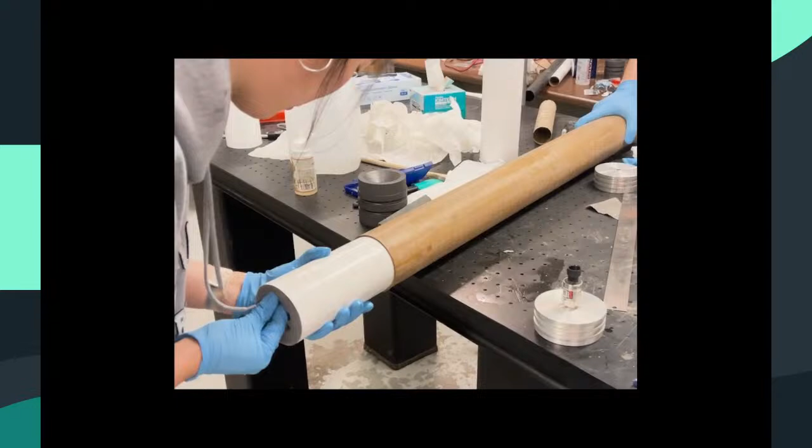It means doing things by any means necessary, even in the face of adversity. From within, to push away my fear, to stand where I'm afraid. I am through with it. It means rising up to the challenge in pursuit of greatness. Will you be a witness?

This is how we're going to space. The night.

They are the Rensselaer Rocket Society, and their rocket's name is the East Coast Ghost. The East Coast Ghost is a white rocket trimmed with black, and we're sending Rensselaer Polytech in 5, 4, 3, 2, 1, ignition.

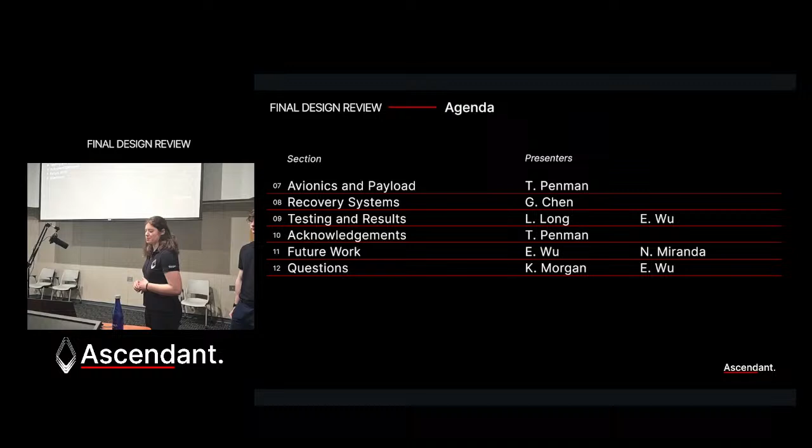Alrighty, so we'll kick things off. We have a brief introduction into our team structure and a little bit about what we're actually trying to accomplish here. From there, we'll delve into more of the technical aspects of our subsystems, and we'll thank all of our amazing sponsors and help that we've received along the way. We will talk about our future plans, future work, and then we'll do a little Q&A session at the end, so I ask that you please hold your questions until then.

So starting off, what do we do? We are the Ascendant Research Group, a faction of the Rensselaer Rocket Society, and our mission started all the way back in 2022: to develop a two-stage rocket on our own composite rocket propellant to launch up beyond the Kármán line, which is the international line dividing Earth and space.

So how will we get there? To start off, our design is a little different from some other typical college teams that you will see. First of all, we are going with a two-stage design, which is more efficient in terms of propellant and cost than a typical single stage. Additionally, we manufacture and design our own custom propellants in-house. This is different from some other teams that may get them outsourced or bought commercially. This way, we can customize our propellants exactly to our own needs. And then lastly, as you saw, we are a pretty small team. When you see rocket teams, typically they're upwards of 60, 70, if not way more people. Our team, we like to keep it small, and all of our teammates are very highly focused and dedicated to the project, so we all have a lot of skin in the game.

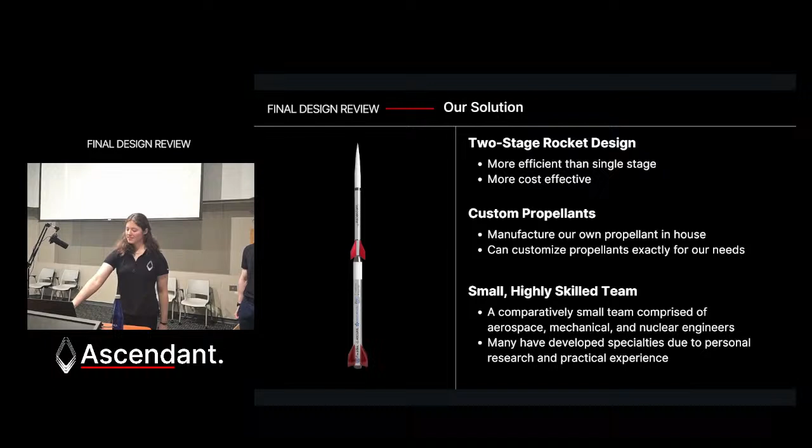So I'll do a little brief subsystem introduction. We have our propulsion team, this is the one that I'm personally a part of, and we go into the actual development and formulation of our solid composite rocket propellant. This involves writing our formulas, writing our mix procedures, actually mixing the chemicals, getting all the safety procedures written out so that we can actually pull this thing off, and more.

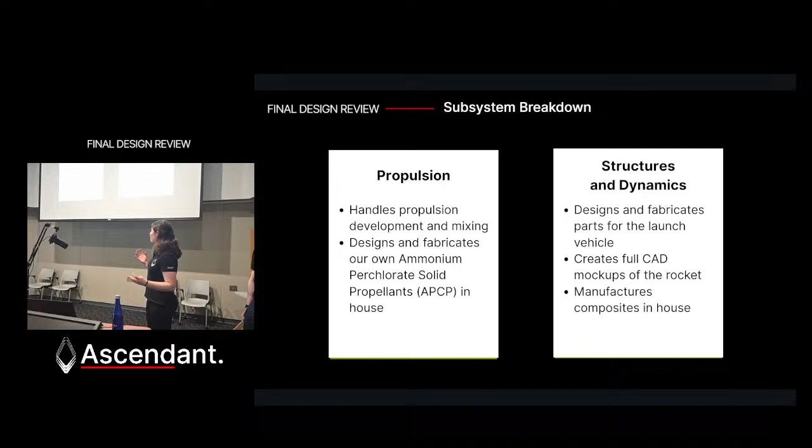The structures and dynamics team design and fabricate parts for the actual launch vehicle. So our rocket, as you may be able to see up front, this is one of our stages, was all developed with CAD first and foremost. Our computer-aided design, we have full CAD drawings and designs of everything. That was all done by our structures team. Dynamics also simulates everything so that we can predict how it's going to behave in our flight. We also manufacture a lot of our composites in-house. So this nose cone was fully manufactured in-house with fiberglass, but we'll get more into that later.

Our last two subsystems are recovery and avionics. This ensures that our rocket can come back safely. Another thing that's unique about our team is we intend to fully recover both our booster and our sustainer stage. So this requires a lot of work from the avionics and flight computers and parachutes teams to make sure

that everything's coming down safely to fulfill all FAA guidelines. Additionally, as a part of this team, we have our payload, which is our camera system. This will be discussed in more detail later on, but we intend to get very high quality footage of what's going on up in space. So that's what this subsystem goes over.

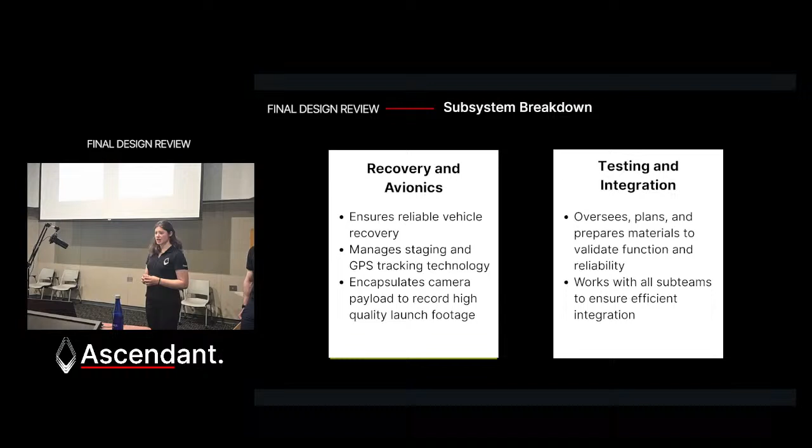We also have our testing and integration team. Much like the name indicates, this team oversees a lot of our testing procedures for many subsystems. It works with all of the sub-teams and helps us really integrate the entire thing together and make sure that everything's working properly. So, hand it over to them.

Before we get into some of the more technical details, who are we? What does our journey look like? We'll show you right now.

The group somewhat officially began in fall 2022 in my garage, where we started mixing very low-grade sugar propellants. They're not as dangerous, they're almost inert, and really hard to ignite actually. We mix these because our insurance agency, Tripoli, only allows you to do this once you're a level 2 certification, which takes a few flights, a few tests, and proof you're able to handle energetic materials. So while we were working on these certifications, we were in my garage off campus mixing sugar propellant to make sure we could get down safe procedures, and talking to people who actually mix propellant professionally.

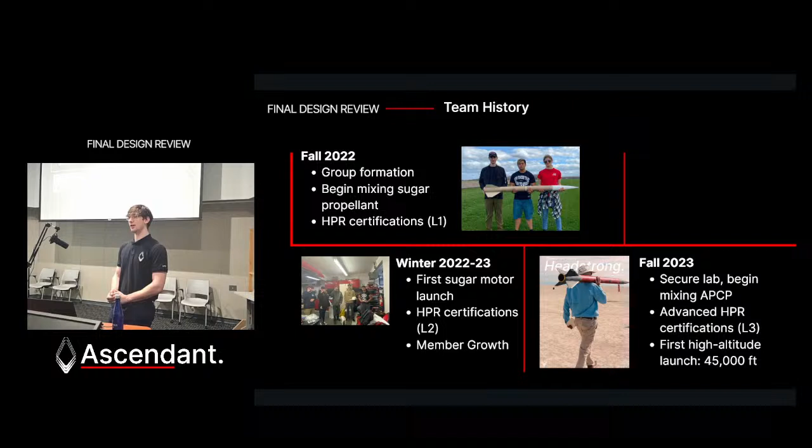Next, in winter 2022 going into 2023, we made our first sugar motor launch, and it took a few attempts because again, it's almost inert, really hard to ignite. We finally got our L2s around that time. By fall 2023, thanks to Professor Oschlager, we actually acquired a lab. We started mixing high-grade propellants, and we launched a rocket to 45,000 feet.

Next, I'll pass it to Joe and Noah, who will talk about dynamics.

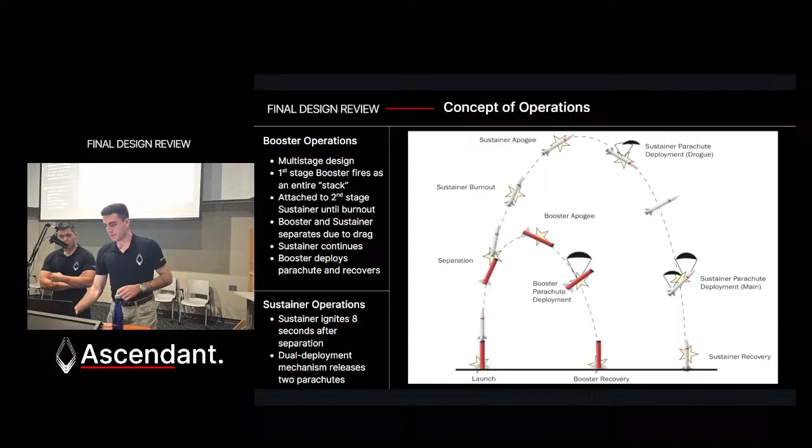Before you begin designing any launch vehicle, it's important to understand fundamentally the mission and the flight profile so that you can design the more intricate parts such as the fins, recovery methods, and so forth. Here we have essentially a concept of operations that outlines every significant step that Joe is going to go over. You start your rocket as essentially 2 rockets on top of one another. That's essentially how the 2-stage rocket design works.

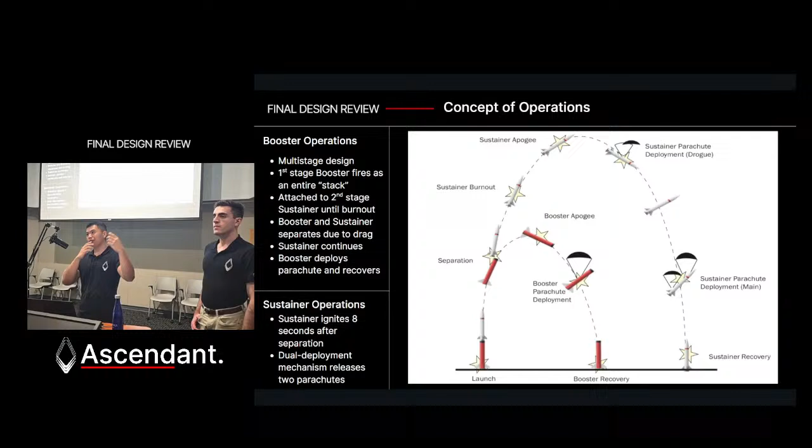Your booster stage, or first stage, ignites at launch up to a certain point, known as burnout. After that booster motor burns out, the differential in drag between the booster and the sustainer will cause them to separate. After separation, the booster would still proceed on a nominal trajectory and then deploy its parachute. In that process, the sustainer will continue coasting for about 8 seconds until ignition. That number was chosen to optimize our altitude while reducing potential maximum aerodynamic pressure.

And like we show in the graph, the sustainer actually has a dual deployment mechanism to avoid drift. This is also incorporated in the booster. However, that will be covered in the recovery section of this presentation.

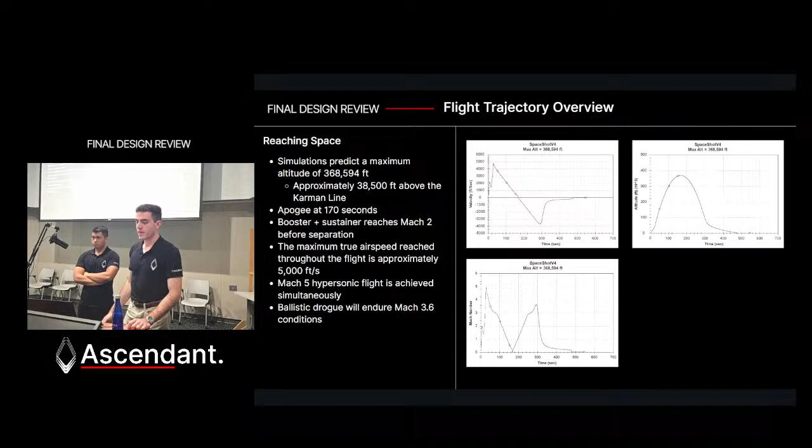For the actual flight profile, based off of simulations which are semi-empirical, based off of data recovered from 20, 30 years of flight testing, early flight testing in the days of NACA when sounding rockets were really taking off in terms of viable technology, our simulations predict somewhere around 368,000 to 369,000 feet. There's a significant gap between the Kármán line and the actual altitude, so we can almost confirm that we have indeed reached space.

If our rocket, once it's manufactured, doesn't behave as we expect, which is somewhat likely because we can only produce a vehicle with such tolerance that we have access to, we expect an apogee at around 170 seconds into flight.

When the booster and sustainer stages are stacked on top of each other, we are going to reach just under Mach 2. This Mach 2 point exerts a lot of force on the rocket because we're still relatively low in the atmosphere. Even though we will be expecting Mach 5 flight with only the sustainer, a lot of the aeroelastic considerations, which I'll discuss in a moment, had to be made around this low altitude Mach 2 flight.

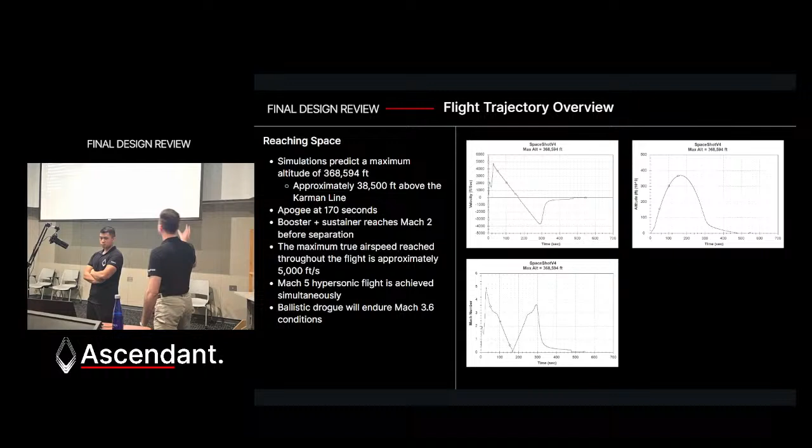On the top left, we have the velocity as a function of time. Right around the time we actually do reach Mach 5, which is only the sustainer, we're a little under a mile per second in terms of true airspeed. On the right, we have the altitude, so right around 170 seconds you can see we peak just under 400,000 feet, and then the slow descent.

The Mach number chart actually very clearly shows some of the separation events. The very first vertically upward line is when we reach Mach 2 with the booster. It's eventually going to separate, and we'll coast, so we'll have a bit of a reduction in our Mach number. The sustainer will ignite once more, reach right around Mach 5, and then it's going to continue to coast until it reaches apogee.

Now, in terms of the aerodynamic layout, the full stack will appear something like this. The actual sustainer stage that we will be using is right on the table in front of you. It has a 6-inch to 4-inch diameter reduction, so as a result of the needs of the propulsion team, the structures and aerodynamic considerations had to be made around this design.

Of course, both stages are going to need fins for passive stability. The fins used on the sustainer are a diamond airfoil shape with a constant thickness to chord ratio, and as a result we were able to use empirical data to ensure that the flutter speed would be high enough that we don't have to worry about significant aeroelastic effects. They are also slightly rounded on the front to reduce aerodynamic heating.

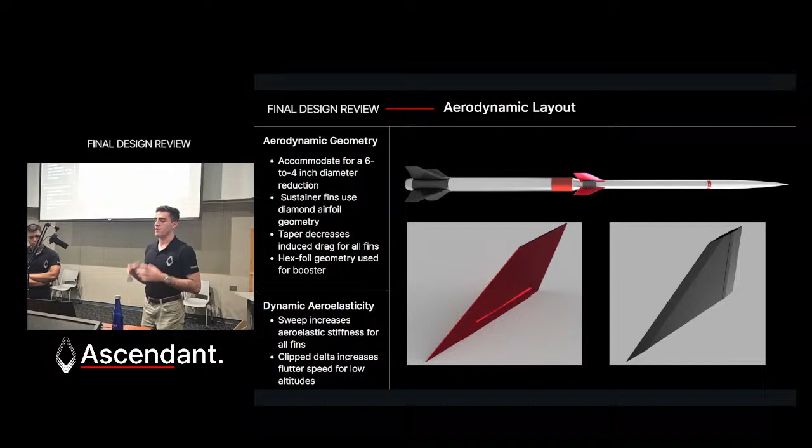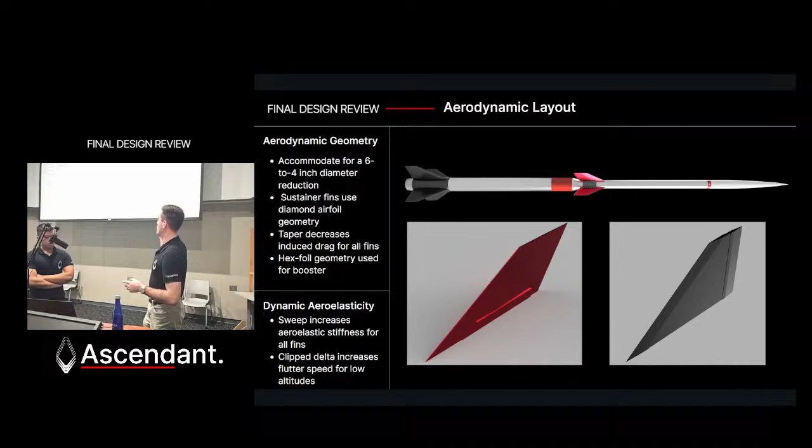As for the booster fins, these had to be a lot more rigid in terms of their aeroelastic effects because they're much larger, since we need stability in the full stack. They could be more susceptible to flutter, which is why we selected a clipped delta shape, because it's more rigid with respect to aeroelasticity, so we can ensure vehicle reliability.

Aerothermals get very interesting once we start reaching high Mach numbers. If some of you have taken compressible flows before, you know that it's a very nonlinear regime in terms of heating and the temperatures that we can expect.

As a result of these studies conducted by others in the industry, we were able to determine that we need at least 4 inches of titanium on the nose cone. That nose cone up there has an aluminum section, but it'll look very similar in shape, and the actual tip will be as sharp as possible. The heating will be extreme, which is why we're using titanium, but we want to make sure that the frontal shock wave remains as attached as possible to reduce wave drag and hopefully increase our altitude. To additionally protect the nose cone, we are going to have ablative materials to reduce heat transfer.

To get a better picture of the heating, I ran a supercomputer simulation on 300 processors with full real gas effects. I assumed a 1/16th inch nose radius with a 700 Kelvin wall temperature, just for an initial look at what the heating could be.

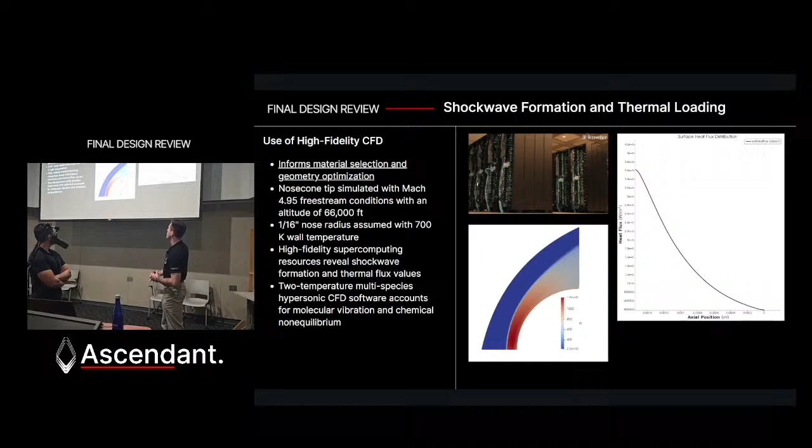A very interesting phenomenon that occurs when you're going at such high Mach numbers, and especially in thinner areas in a rarefied regime, you encounter what's known as pitch-roll coupling, a lot of people call it coning. Essentially, your pitch and roll moments become the dominant moments within the rocket and cause your rocket to essentially corkscrew.

One thing that may be asked is, why not go to a more active control scenario? It's just very hard to implement, we'll just put it that way. You're essentially making a missile.

Modeling this at lower altitudes can allow us to identify potential failures that can create any instances of coning, which, in mild cases, reduces your altitude by about half. In severe cases, you lose your vehicle. So this sort of modeling is extremely important, just so we can see that our geometry is validated.

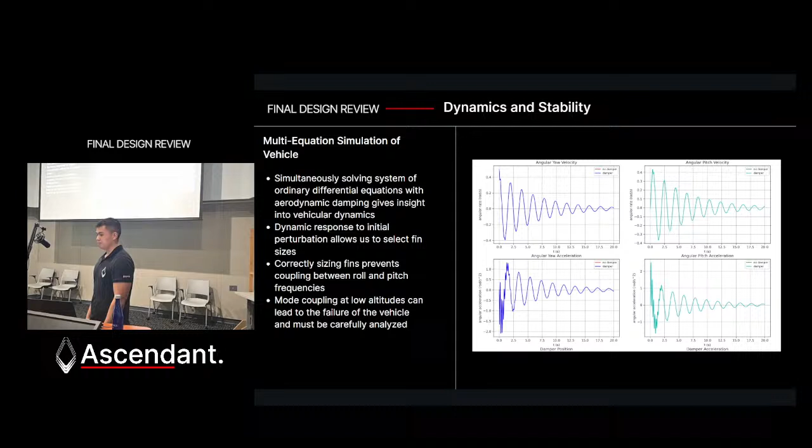Adding to that a little bit, with this software that I coded, which simultaneously solves 11 differential equations, we were able to predict what kind of fin area we would need based on some empirical evidence, some curve fitting, and some basic hypersonic laws of the rarefied regime. Because once you reach hypersonic speeds, air molecules don't necessarily act as a continuum, especially at higher altitude. They're more like shotgun pellets in terms of their behavior because they really don't mutually interact with one another.

As a result of these simulations, to prevent coning and to ensure that any resonances between the natural frequencies of your roll and pitch aren't coupled, or aren't as strongly coupled, we are able to properly size these fins and their cross-sectional geometry.

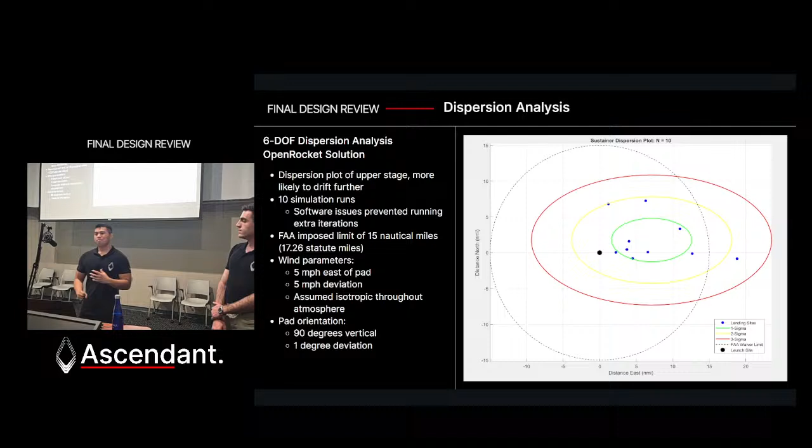Moving on to what happens to the sustainer once it reaches apogee and where it's going to land. When launching any sort of rocket that goes beyond a certain impulse limit, this is known as a Class 3 rocket, you have to file a waiver and a Class 3 form. One of the major considerations is the dispersion of your second stage, since that is most likely to drift.

So we conducted a 6DOF dispersion analysis using OpenRocket. I'm sure those in the rocketry community are very familiar with the software, where we plotted the upper stage. We did 10 simulation runs. We had some issues plotting more than that due to the solver, but it gave us a good understanding of where the rocket would land given 5-mile-per-hour easterly winds with a 5-mile-per-hour deviation.

Our pad is assumed to be straight vertical with a 1-degree deviation. And as you can see on the chart, 90% of our landing sites are within that 15 nautical mile radius that is given by the FAA.

Outside of that is essentially a bit of an iffy area. This waiver essentially allows us to fly within that zone, but the rules get a little wishy-washy when you have to recover outside of it. So you want to prove to the FAA that we're going to land within the cylinder, and that's what this simulation achieved.

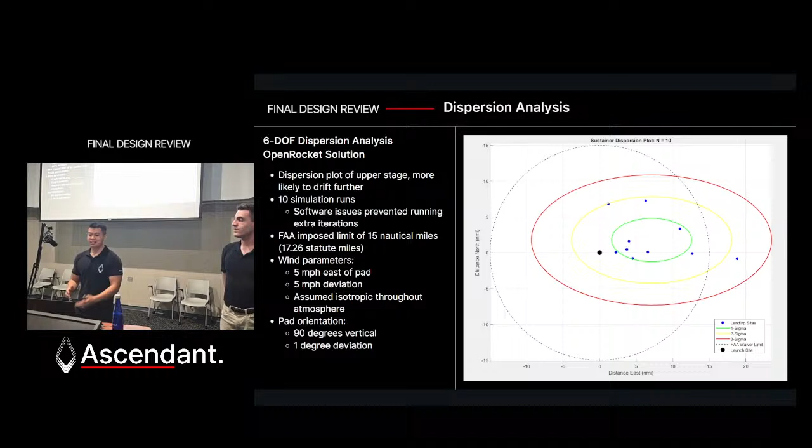And now we're going to pass it to Sawyer and Rowan to talk about the development of our propulsion systems.

All right, propulsion. What I would consider to be pretty much the lifeblood of the rocket. You can't really get to space without it. So what is the goal? Provide the means to get to space. You need to be able to actually have something that powers your rocket in order to get into space.

So what does it need to do that? We have to utilize the best chemicals available to us. So that's ammonium perchlorate, aluminum, hydroxyl terminated polybutadiene, that's the fuel and also what binds everything together.

It needs to be manufacturable. So in our case, we want it to be pourable and heat curable, because it means we can decide when it solidifies, and it's able to shape around more complex geometries.

And it also needs to be able to meet the required flight dynamics. So our booster needs to be able to get our rocket moving and stable and fast. So that's where we're trying to achieve around a 15-to-1 thrust-to-weight ratio.

And the sustainer doesn't really matter how it burns, but we want it to burn as long as possible. So how do we do that? These are our formulas. I'm not going to say these are the most optimized formulas in the world, but we had to make compromises.

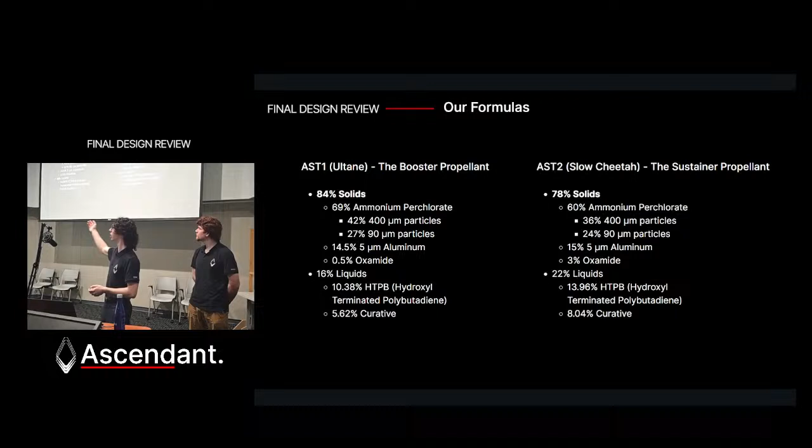So our solid loading, our first stage, or AST1, is 84% solids, and our second stage, AST2, is 78% solids. Both of those are not very great, the 78% solids especially. But what that does for us is that propellant burns real slow, and that propellant burns faster, because you have more solids, they're able to conduct the heat faster. And so that's one way we regulate the burn rate.

If you also notice, there's two different particle sizes for our ammonium perchlorate, which is our main oxidizer, and that is to improve pourability. But because it's bimodal, or two sizes, it's not the best, and that was because we only had these two sizes available to us. If we wanted to go with a more finer particle size, we would have to mill it down ourselves, which is really not ideal, especially because we don't have any prior experience doing it.

And then we have aluminum. This is an additive that allows our propellant to be much more energetic, as well as be a little more pourable, because it is that smaller size, only 5 microns.

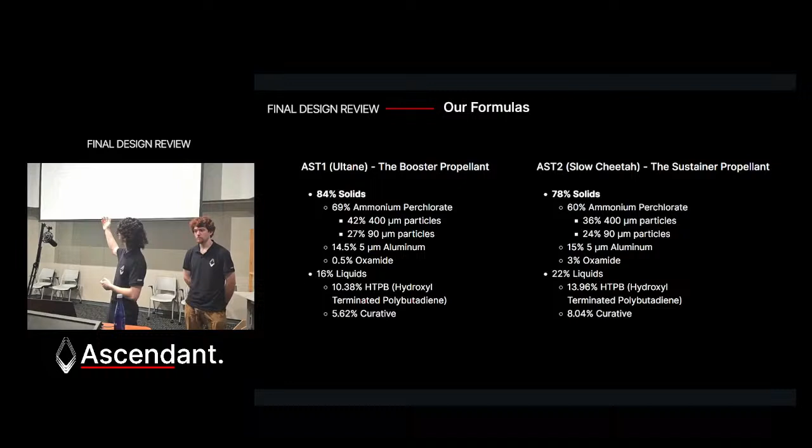And then the oxamide, this is a burn rate suppressant, so this will cause your propellant to burn slower. It will also act as a little bit of a stabilizer, so it can stabilize out any of these burn instabilities. So our second stage propellant has 3% oxamide, and our first has 0.5%. So it's really not doing all that much in terms of slowing the burn on the first stage, but it is doing quite a bit on the second stage.

And then the liquids are split between our ratios of the binder, which is the HTPB, and the curative, which actually sets it and gives us the desired hardness, cure time, and all those sorts of things.

So, iteration process, we went through this a ton. And what I would say is probably the most important tool we have is a strand burner. This allows us to basically pressurize a chamber and simulate effects inside of a rocket motor. This requires very little setup work, and we can iterate extremely fast. So we can get a new formula, mix up a small batch, throw it in there, do 3 burns, and get a good idea of how it burns. If it's terrible, we're like, okay, that doesn't work, try something else. And that can be done within days.

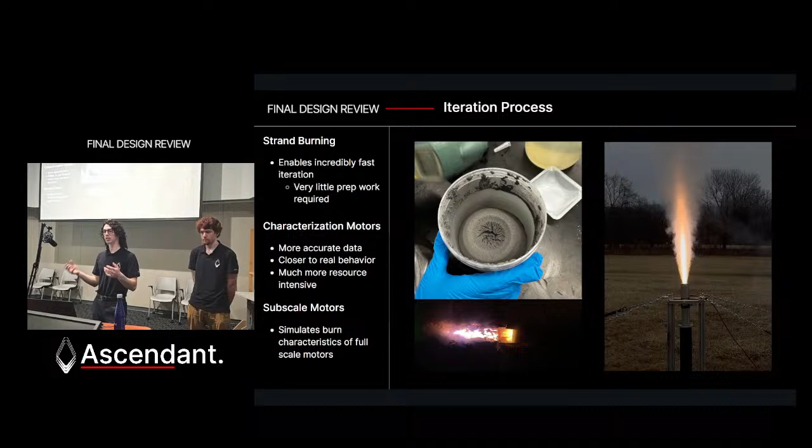And then, once we have something we like, we move towards characterization fires, so a little bit bigger motors, more propellant. They're able to better simulate what it would actually do in the motor and give us just better data, despite requiring much more resources. Then, after we have that data that we're happy with, we move to subscale motors. So we'll do something either a little bit longer or larger, kind of an intermediate between these small 54 millimeter in diameter motors that really simulates what the full motor will burn like.

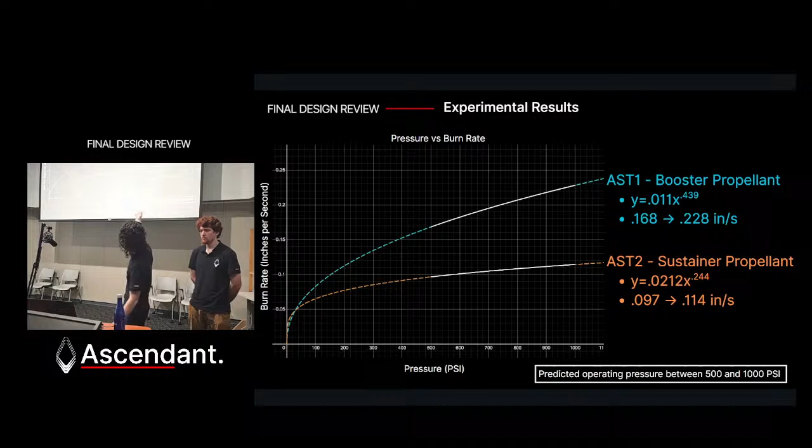This brings us to experimental results. So our first stage propellant is that blue line, and the second stage propellant is the orange line. This equation on the right models out what the burn rate will be, so it's a pressure versus burn rate graph. That white line is kind of our expected operating pressure. So at 500 psi, the sustainer propellant will be burning at 0.097 inches per second, while the boosters will be burning at 0.168 inches per second.

Hi, so now to talk a little bit about the design of these motors in regards to the propellant geometries. For those of you not familiar, solid rocket motors burning is all a function of burning surface area. Even though it may look like a tube, it is not a solid tube. There's usually a center perforation that gives the solid propellant surface area to burn. There's a lot of ways to control this surface area, and that is where you get into the design of the propellant grains.

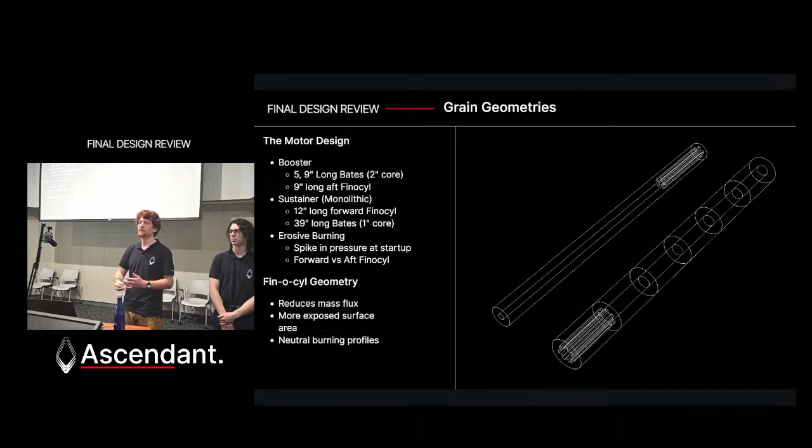For the booster motor, it follows a much more neutral burn profile, as in the pressure and thrust of the motor stays very neutral throughout the length of the burn. So having this finocyl at the aft end of the motor controls our mass flux a little more and allows the simulated pressure curve to follow much more closely the actual observed, through empirical testing, pressure curve.

So here are some, this is a simulation of the burning of the motor. As you can see, it starts with burning inside out of this core, and you can see how the finocyl grains progress over time, as well as just the standard bates or cylindrical grains.

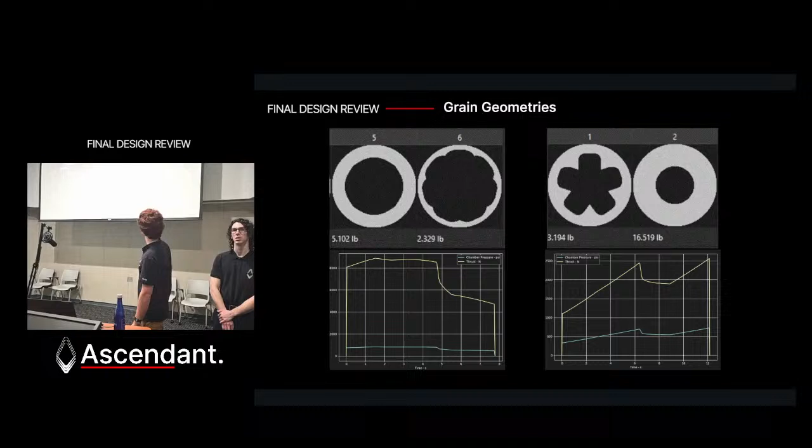One important thing to note is on the left-hand side of the screen, that is the booster motor, and on the right-hand side, that is the sustainer. The yellow line is the chamber pressure of the motor versus time. I know you probably can't see numbers, but you can at least get the general idea of how they perform over time.

Okay, so now I'll pass it off to Kate to talk about the mixing procedures.

You heard a lot about how our propellant was developed, and now we get into the formulation process. We work in a lab at WPI, which requires a lot of safety procedures. We work consistently with the Department of Environmental Health and Safety to ensure all our safety codes are being followed. We write our own standard operating procedures for chemical storage and handling, and use our own personal lab PPE to stay safe.

We have procedures in place for doing these mixes because they take a while. One of the first things we consider is our desired yield, how much propellant we're making by mass. This also includes what kind of geometry we need, since this involves making our own mandrels, which we either machine out of aluminum or 3D print out of ASA. We also have to consider how much ingredient is needed for the day, since we have to receive this from a separate storage facility on campus. Lastly, we consider how we can minimize waste in terms of this yield.

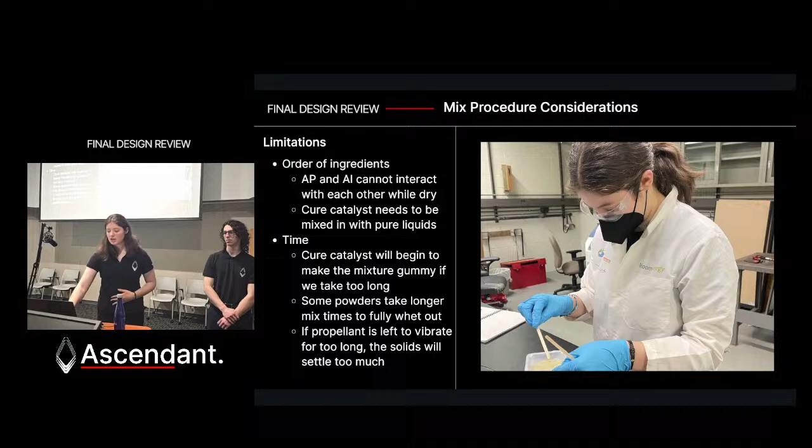Next I'll walk you through a typical mix day for us. We've been very generously offered a mixer from a company called FlackTek, which Sawyer will get into in future slides. This mixer has a maximum mix capacity of 1 kilogram.

The Sustainer motor, our smaller of the two motors, requires 12 kilograms worth of batches, so we had to do a lot of planning. What we settled on was a cyclic mixing structure - essentially 4 cycles of 3 batches. You add all of your ingredients for your first 3 batches, mix them in sequence, and then cast them all at once. Then you do the same thing for your next 3 cycles.

So on mix day, before mix day, what you can expect is to prep all of your casting hardware - making sure our casting caps and mandrels are all straightened out, making sure everything is in order. We also have to cut and surface prep our casting tubes, which are made of XX grade phenolic, a very tough composite material that we cannot just cut on the spot. We have to do a bit of preparation for that.

That also has to happen in advance. Once we get onto actual mix day, we do a pre-mix with our liquids, then we pour them into our little FlackTek containers according to our appropriate batch size. Then we add in our ingredients one by one in that cyclic fashion I mentioned before, and we mix the cycles in the FlackTek.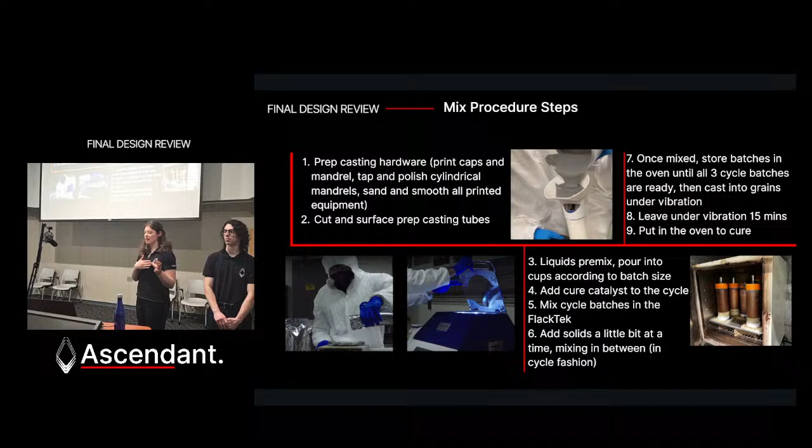Once everything is mixed, we store them at an appropriate ambient pouring temperature in our curing oven, just to keep them at that temperature until all batches are ready to be poured. Then we pour them, as you can see in the top image, using a funnel into our casting tubes. We do this under vibration again, and then everything is left in our curing oven to cure at 60 C.

Depending on the cure time of the propellant, because our propellants have slightly different cure times, that determines when we can do our post-processing. Sometimes it's just later in the day, sometimes it's the next day.

What post-processing involves is demolding, taking the mandrels out of the center of our now hardened grains. We trim off that resin-rich portion that I mentioned in the past, and we also do something we call density scoring, which basically accounts for all of the excess mass that is not propellant and the negative space for our coring mandrels, and we calculate the actual density of our propellant.

This allows us to do an extra safety check before any sort of launching that ensures our propellant is hard and solid all the way through. We don't want any extra voids in our propellant, as that would give us extra unpredictable surface area for burning that could have the potential to blow up our motor. So those are a big no-no. We try to avoid them at all costs.

And yeah, that's basically what we do for processing and mixing.

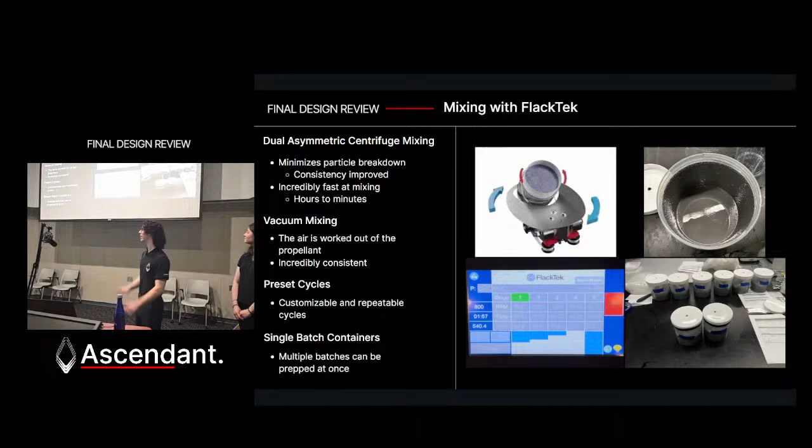All right, so mixing with the FlackTek. The FlackTek is a dual asymmetric centrifuge mixer. Fancy. As you can see in that image in the top left, it rotates the cup as the whole machine rotates. This causes different viscosity fluids or particles to shear and actually mix the liquid.

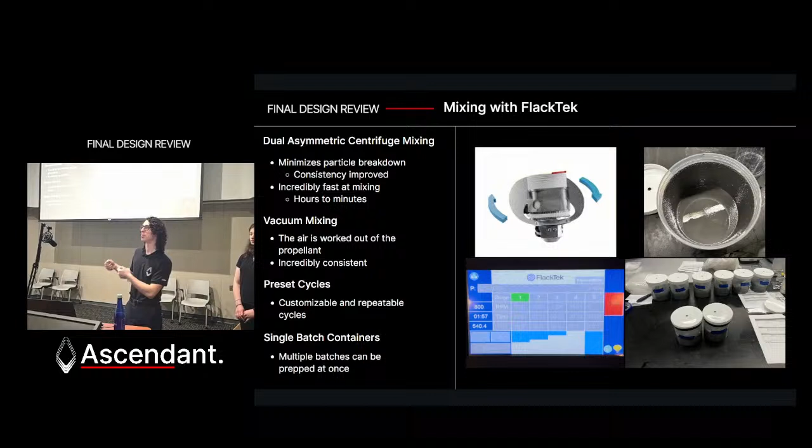The mixer is also a vacuum mixer, which means that as it's mixing, the whole thing is under vacuum, so air cannot be added into the system, it's only taken out. What's especially nice about this is it's constantly folding over the propellant as it mixes, exposing more surface to that vacuum and pulling the air out even better than if you were to just place it in and have it vacuumed.

With the FlackTek, we're able to have preset cycles. These are all customizable and can be repeated as many times as we want. We can also have up to 100 of them, 100 different ones. This allows us to have incredibly consistent procedures, so we know that if we put the same materials in, we will get the exact same result.

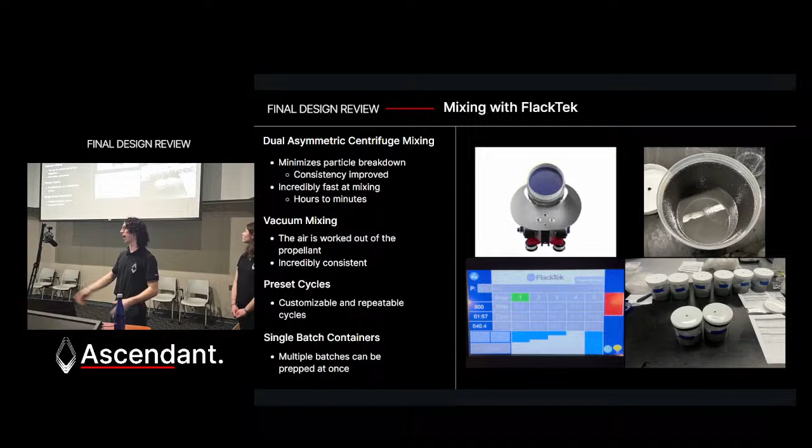We also have single batch containers. As you can see at the bottom right, all these batches are lined up, so we can just take one container, put it in, do the first cycle, then do the first cycle on the second one, then go back to the first one again to do the second cycle, and so on.

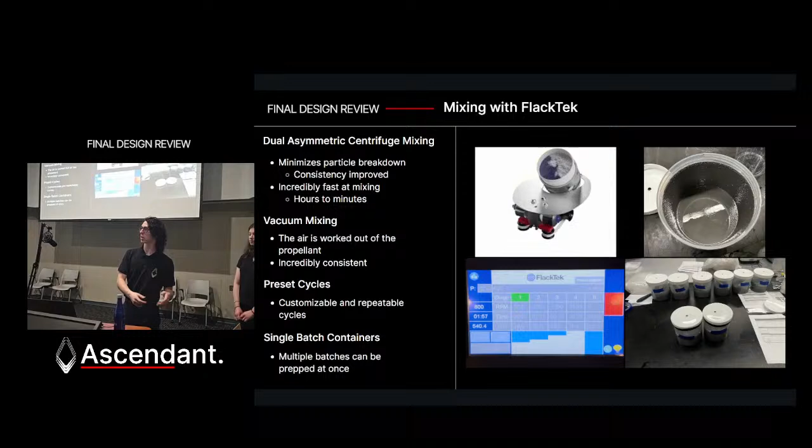So roadblocks—what were the problems we actually ran into? There were some shipping delays at the start, so we had a bolt fall out and it threw an error, so we had to resolve that. We sent it back and everything was fixed, and that was fine.

Then propellant processability—this was a huge issue for us, because we had never used a mixer like this before. We found that by varying things like speed and the amount of time, it would drastically change how the propellant comes out. You may not have caught it very early in the slides, in the formulation slides—you can see the container with kind of like a brick of propellant in it. That was some of our first formulations, as well as mix cycles. We kind of had the worst of both worlds in terms of having a pourable propellant and understanding how we need to mix our propellant to get it to be more pourable.

After that, we were like, okay, this can't stay like this. So we went back and reformulated a bit.

Then we took that and mixed a bunch of different variations until we got something pretty good. And then we ran into some issues with consistency. We were kind of on the edge of something that was mixable versus the actual mix procedure being correct.

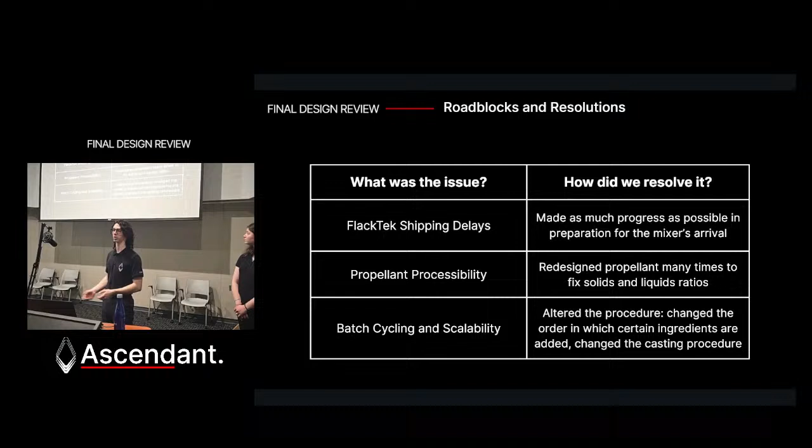Now I'm going to pass vehicle design off to Constant and Joe.

Now that we understand the propellant formulation process and how it's manufactured, fundamentally we need to understand how we can contain all the energy produced by these propellants to create a safe and reliable launch vehicle. To do that, we're going to break every part down, starting with the highest level: this is how the full stack will appear with the booster and sustainer stage.

As stated previously, it's a 6 to 4-inch reduction. The two-stage design allows us to be much more efficient in the amount of propellant we need to produce, which saves money and saves us a tremendous amount of time, since we're producing all of these propellants in-house in our own lab.

Starting with the first stage booster, it's 6 inches outer diameter with fins constructed from carbon fiber cloth with an inner fiberglass panel. We found this material selection efficient in two ways: it's very lightweight, so we gain additional altitude, and it's also quite rigid, so aeroelastically it's efficient. They also have to be large for stability purposes.

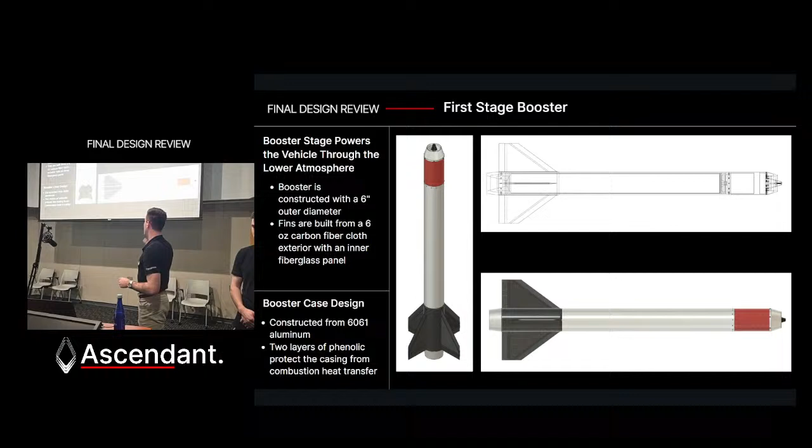The actual case is made from the same aluminum we've been using throughout the rocket, 6061 aluminum. On the interior there are 2 layers of phenolic, one being a casting tube in which the propellant is poured, and a casing liner. These 2 layers of phenolic help protect the aluminum from the very high combustion temperatures, because aluminum is a soft metal with a relatively low melting point, so we need to ensure it's able to contain this energy.

For the part that couples the 2 stages together, we're using an aluminum structure with a slip-fit cone that inserts into the exit cone of the second stage nozzle. This gives really good rigidity under acceleration, because it locks the 2 parts together. It's a 3-part design for ease of manufacturing while maintaining rigidity, held together by screws with a fiberglass coupler or airframe bonded to the aluminum. This also holds the parachute and recovery section for the booster.

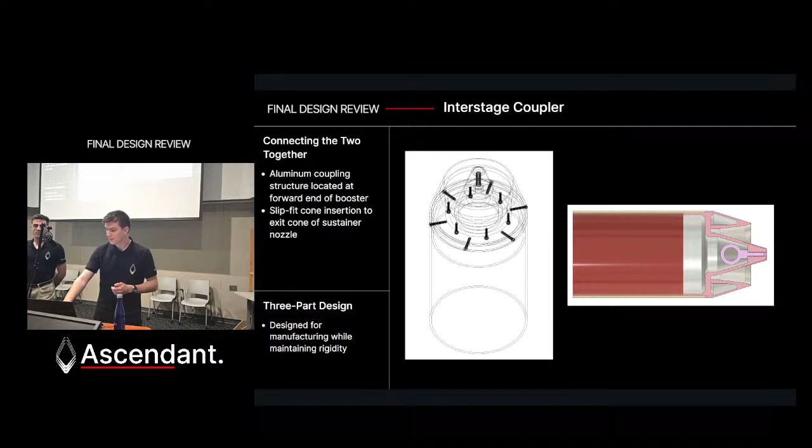For the second stage sustainer, we're going with an 8-foot long rocket, 4 inches in outer diameter. It follows a sub-minimum diameter construction in that the motor case is the airframe as well. Typical rockets usually have an internal motor mount, but this is inefficient for high-performance flights. This thing is built to be rugged, to endure a hypersonic flight, but also cheap and reusable. We follow a bolted fin design using 6061 aluminum fins with brackets bonded to the motor case, which allows us to get a lot of strength out of this.

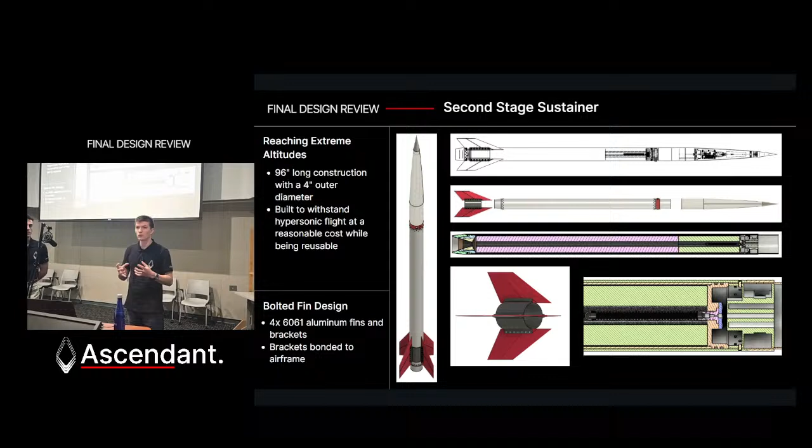The top of essentially what spearheads through the atmosphere is a nose cone, and this is built rugged and durable. It follows a 7:1 von Karman shape profile made out of fiberglass with a titanium tip due to the high temperatures mentioned in the dynamics slide.

You can see a common failure point with high-performance rockets is that the nose tip is not adequately retained, and if stresses are high enough, the tip just falls off the rocket. That results in airflow entering inside the nose cone, and the rocket ends up collapsing in on itself, which is not ideal.

Our design, which is special, has a frustum that allows the tip to thread in and preload into the nose cone. It becomes virtually impossible for the tip to fall off, short of the steel threaded rod shearing.

The nose cone is what holds our electronics, because we're trying to be most optimized for volume and mass packing.

The sled is also structural in that it holds all of the recovery forces once it separates from the rocket. You can see how it's laid out - the black tube is where the main parachute is stored inside the rocket. It's called a chute cannon. The recovery team will get into that in a future slide.

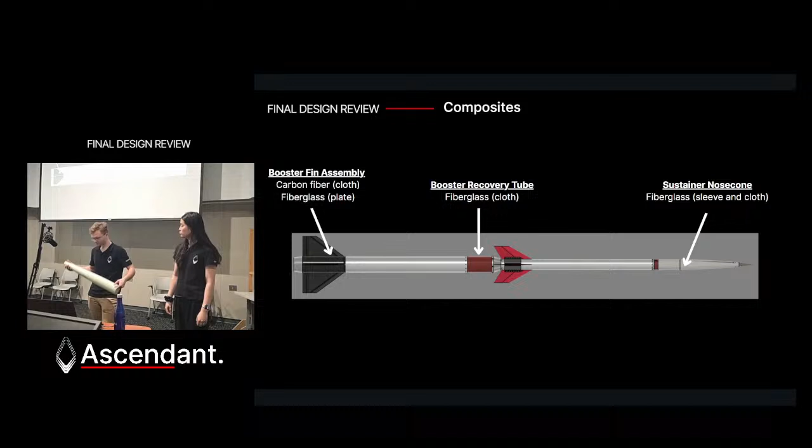This is our rocket. The exterior is made up of 3 separate materials. The nose cone tip is made up of titanium - it's the only part that's made of titanium. The second material is aluminum, used for the body tubes of the sustainer and booster, the sustainer fins, and the interstage coupler. Finally, what we manufacture in-house are the composites.

This includes carbon fiber and fiberglass. From left to right, this includes the booster fin assembly, made of fiberglass and carbon fiber; the booster recovery section, made of fiberglass - a small tube where the parachute for the booster sits; and finally, what I'm holding right here is the actual nose cone. Although it looks simple, this took us roughly half a year to get the manufacturing process down.

As Constantine said, it's a 7-to-1 von Karman shape, and it probably doesn't look like it, but the shape is pretty complex. So we're going to go through how we actually manufacture this and the two different steps, which are the prep and the actual layup. So what is this actually made from?

This is made up of two different types of fiberglass. The first type is 4-inch fiberglass sleeves, which you can see on the bottom left with the blue background. These sleeves can basically roll right over - very simple. The second type of fiberglass we use is normal fiberglass cloth.

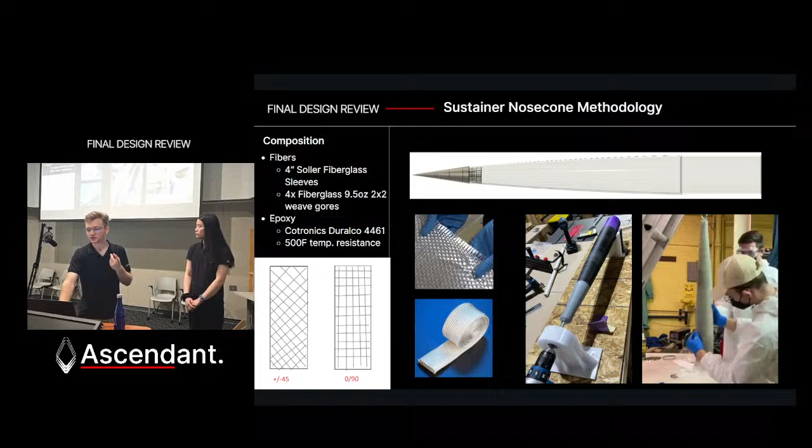So to prep and make this nose cone, we have to make a mandrel. This mandrel you can see in the middle, it's made out of PLA and it's 3D printed.

The mandrel itself is very long because the nose cone is very long, roughly 36 inches. It's really hard to get a 3D printer that can make an entire mandrel in one piece, so we separate it into 5 different parts. Then we thread them together and epoxy them, and made a homemade sanding jig using a drill to make it as smooth as possible.

The next step we do for prep is fiber processing. This includes cutting sleeves and also cutting gores. Gores are a specific shape - if you were to take half of this shape and lay it flat. We manufacture this by putting it into a laser cutter. We have multiple laser cutters around campus, and we cut out these fiberglass gores.

And then finally, the layup. The layup we use is a sleeve gore method. The reason for this is concentricity - we want this to be as round as possible, and we found that if we alternate, it allows us to get the greatest wall thickness we can get.

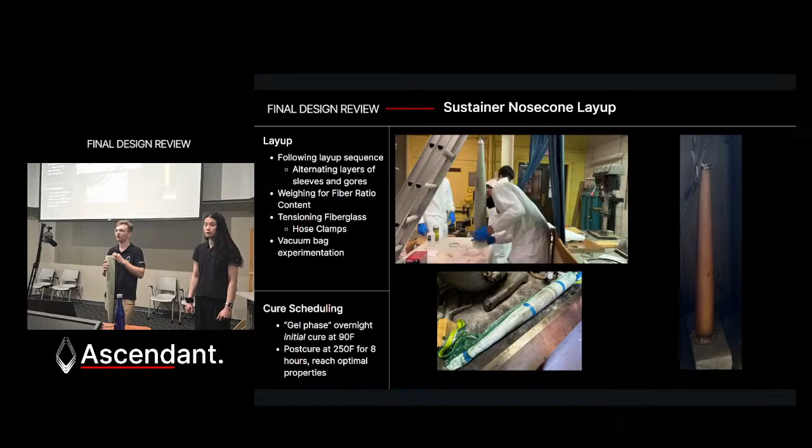Finally, next thing we do is we weigh for the fiber ratio. This is basically the weight of the cloth itself over the entire weight of the nose cone. Research states that to get the strongest material, you want a roughly 64% fiber ratio.

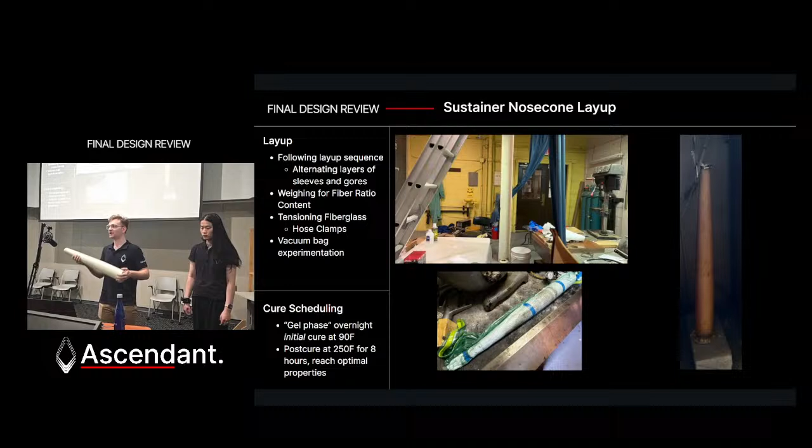And then finally, we've been working through vacuum bagging. Vacuum bagging composites, especially something that is round, is really difficult to do. But we've been experimenting with different types of bags and different procedures to get that right.

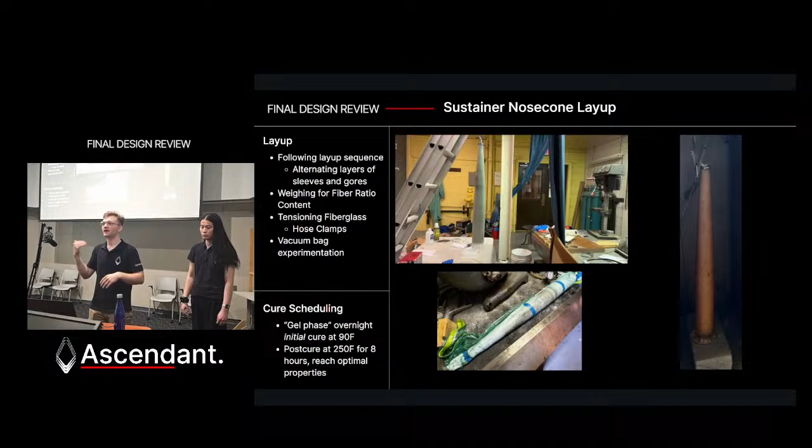After it's laid up, as you can see through this animation, it then goes into its gel phase, which the epoxy requires at 90 degrees Fahrenheit for 24 hours. Finally, we do a 250 degree cure phase in the oven, at 8 hours, to reach the 500 degree glass transition temperature of the epoxy.

We manufacture two other parts in-house. The next part is the booster recovery section, which is where the parachutes are held inside of the rocket. We make this out of fiberglass mainly because of the weight properties we can get from it - it's super light. The actual procedure we follow is something called roll wrapping.

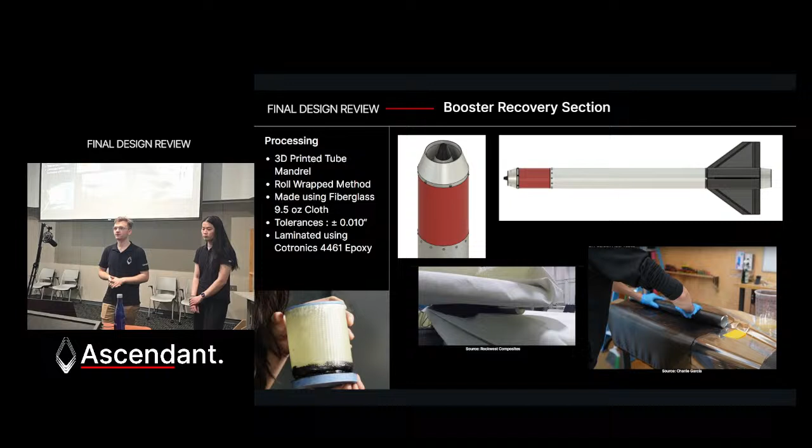Basically, you take a mandrel, a 3D printed tube, and you roll fiberglass cloth over it. This creates a really concentric, strong final product. We use 9.5 ounce cloth made out of fiberglass, and we found that we can get tolerances plus or minus 10 thou. And again, we're using Cotronics 4461 for this as well.

Basically it's a tube that the fins are connected to, and again the reason for this is portability. These fins are very large, so having to transport this from here all the way to Nevada, where we're eventually going to launch this rocket, is going to be really difficult.

The way we manufacture this is we create a tube, just like we were talking about before, using the roll wrap method. And then we water jet G10 fiberglass sheets, bevel them, and attach them using a homemade custom 3D printed jig. And then we do a tip-to-tip carbon fiber layup.

Finally, another thing that took us a long time to get right was the actual vacuum bagging of the fins themselves. You want to do this just so you can push all the layers together, and also to decrease the epoxy amount to increase your fiber ratio content. In the end, you get a stronger product.

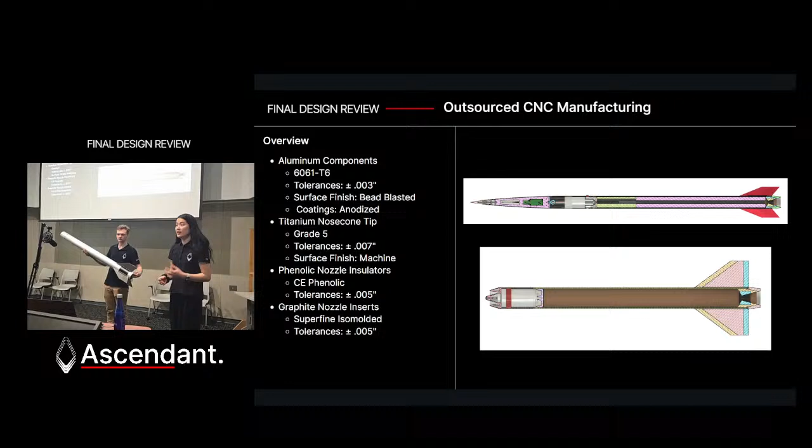We also have our titanium nose cone that we've talked about before. This is made out of grade 5 titanium. We keep these to a tolerance of plus or minus 7 thousandths of an inch with just the machined finish. This is because titanium is incredibly hard to machine, and we need to be able to have this manufactured, and our friends over at HVCC are doing this for us. To make sure that we can get this on time, a tolerance of 7 thousandths is pretty much required.

For the actual nozzles themselves, we have the phenolic carriers. These insulate the case from the hot gases that are coming out from when we light the motors themselves. These are made out of CE phenolic with a tolerance of plus or minus 5 thousandths of an inch. Finally, we also have graphite nozzle inserts. These are made out of superfine isomolded graphite with a tolerance of plus or minus 5 thousandths.

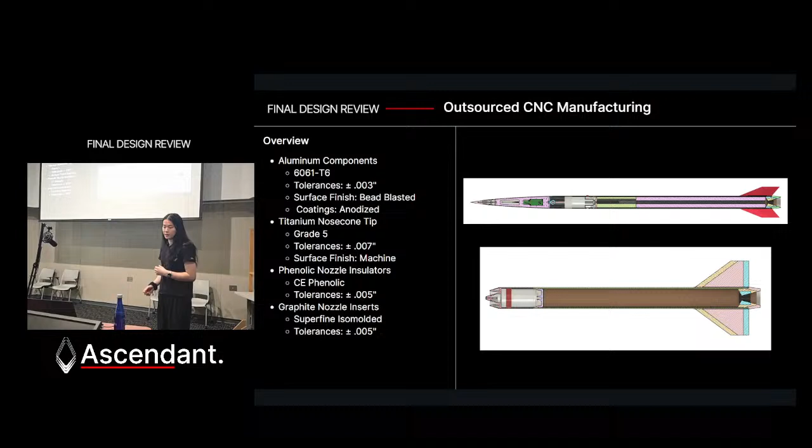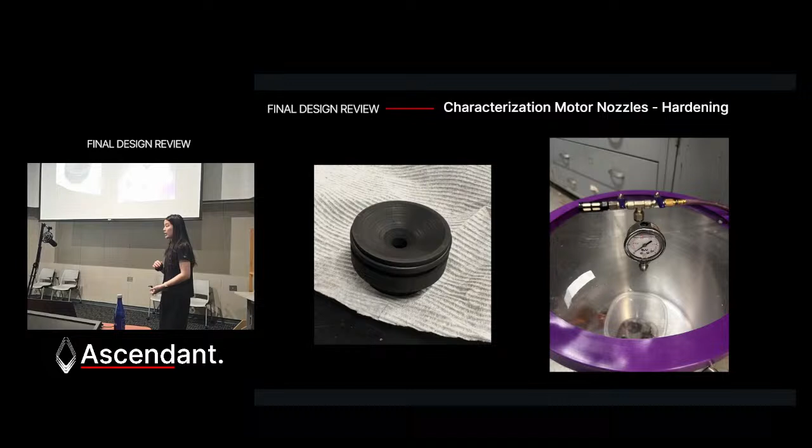We made 5 of these motors in order to characterize and test all of our propellants. To make these nozzles a lot stronger, we do something called hardening. Graphite is a very porous material because it is just a powder that is compressed together. To fill in those pores, we use a polyurethane that we vacuum in to pull out all of the air and replace all of that air with this polyurethane. Once we release it from the vacuum, we let it sit inside of the polyurethane for a couple of days before pulling out and letting it fully cure.

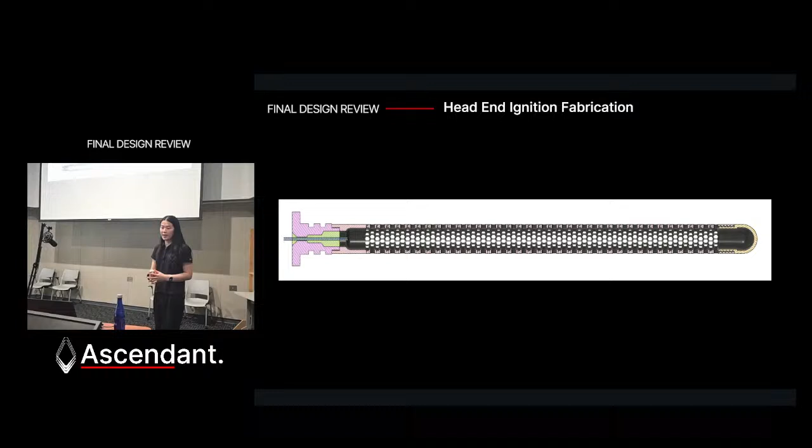The reason why there's essentially 3 different sizes of holes is that way when the pressure pushes against that RTV, it essentially compresses itself against everything, which creates an even better seal, just to help keep those hot gases away from the rest of the rocket. Next we have the basket itself, which holds the BKNO3, which is our igniter system. This is a lot bigger, this is quite long, but it allows us to get the right pressures for ignition.

Next, I'm going to hand it over to Trey for avionics and Taylor.

The black powder charges separate the rocket, allowing the chutes to release. The Kate will attempt to do this at apogee, and Fluxus will do this a couple seconds after apogee.

The reason we chose these flight computers, primarily the Kate, is because it's one of the only commercially available flight computers with no GPS altitude lockout. Essentially, all GPS chips on commercially available flight computers will lock out beyond a certain velocity or altitude. The Kate does not feature altitude lockout, which allows us to be certain we made it to space. Without a GPS chip that has no altitude lockout, we cannot be certain that we made it to space.

We would only be able to use accelerometer data, which is noisy and not entirely accurate. But as the Kate has no altitude lockout, we can see exactly our position during all states of flight below Mach 2, which apogee should be below, hopefully.

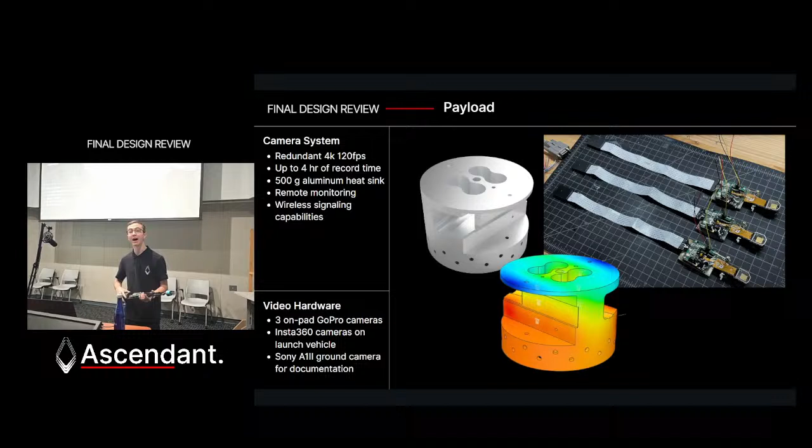In addition to these GoPros, we will have numerous on-pad cameras and video of the rocket's ascent, hopefully via drones and on the ground from where we're standing, with a generous donation from Lens Rental. I'm now going to hand this over to Greg Chen with Recovery, where she's going to talk a little bit more about how we actually deploy these parachutes.

Right, so I'm sure we're all thinking, wow, it is a difficult and impressive challenge to build a rocket that goes up supersonic, hypersonic even.

However, what's just as important and just as difficult is to ensure that it does not come down supersonic. Let's say our sustainer was coming down at what would be its terminal velocity without parachutes. That would be around transonic, and it hits the ground and its speed goes to 0. That is hundreds of thousands of joules of energy that must be absorbed into the structure, and that rocket would completely obliterate itself as well as any person or property in its path.

And as a rocket team, safety is our utmost priority.

So both our booster and sustainer will each be equipped with 2 parachutes. That will be a drogue or pilot parachute right at apogee, and then a main parachute that does most of that air braking. This is known as dual deploy in the rocketry hobby, and it is known to minimize drift.

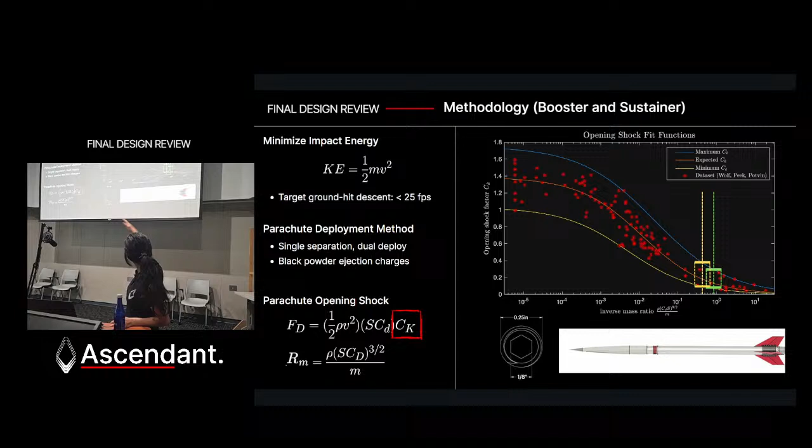It's labeled as C sub K, and this can be calculated by looking at this graph of many data points of reefed parachutes, unreefed parachutes, ribbon parachutes, parafoils, and they graph something called the inverse mass ratio along their opening shock factor over there. It follows this trend. Basically, in simple terms, the inverse mass ratio is the ratio between the volume of air inside your canopy to the mass of your whole system. As this increases, the parachute shock factor decreases. This is how you can obtain that number to plug into your equation.

So over there, we have marked the yellow and the green, the yellow being our booster and the green being our sustainer. That is how we approximated our opening shock value. You'll see this in the next slide. That number was approximated using those upper bounds that you have seen on the slide beforehand.

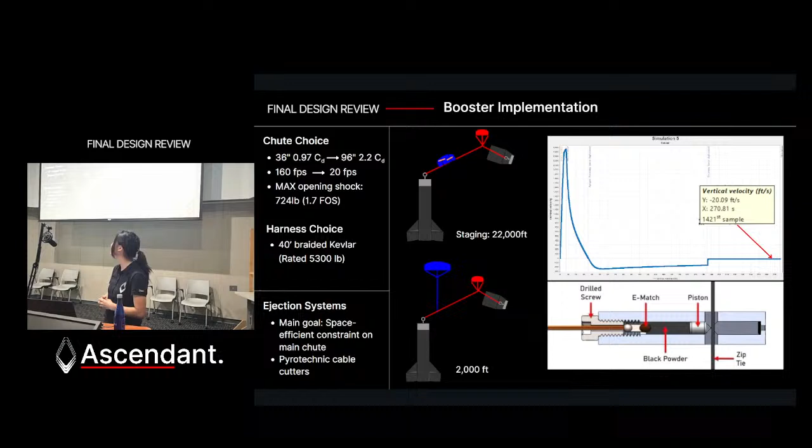So now on to the actual implementation. We'll start off with the booster. You can see with the two images here, the sequence of how the parachutes will come out. The booster apogee separation will occur at the booster's apogee. Imagine the sustainer has already lit itself, it's taken off, and this is a little bit after staging. We are going from a 36-inch diameter chute up to a 96-inch chute. You could also see that descent rate, 20 feet per second, is below the 25 feet per second maximum. We could also see our opening shock has a factor of safety of 1.7.

For our harness choice, we have chosen a 40-foot braided Kevlar harness rated to take up to 5,300 pounds. Now, for this ejection system, how do we want two parachutes coming out of the same spot in the rocket to deploy at two separate times?

Well, that drogue parachute will come out during initial separation. However, the main is protected in a Nomex blanket, and it will be kept in that folded configuration with zip ties. On each zip tie, you can see in this cross section on the bottom here, we will be attaching something called cable cutters, also known as cat claws. This is also pyrotechnic activated with black powder. Basically, when receiving the signal from the flight computer, it has a little piston that will cut those zip ties. That takes away the constraint from the main parachute, allowing it to effectively catch at our desired altitude, which is 2,000 feet from the ground.

And onto our sustainer. Our chute will go from 12 inches up to 60 inches. The drag coefficient also increases as well. We are hitting the ground at 23 feet per second, and it has a similar harness.

For the ejection, the main problem here, unlike the booster, is actually getting full black powder ignition in a vacuum. With a lot of high altitude flights, rocketeers notice that their rocket does not fully pressurize because not all the black powder gets ignited. That's less due to lack of oxygen than lack of air pressure up there. When black powder gets ignited in a vacuum-like state, it tends to scatter.

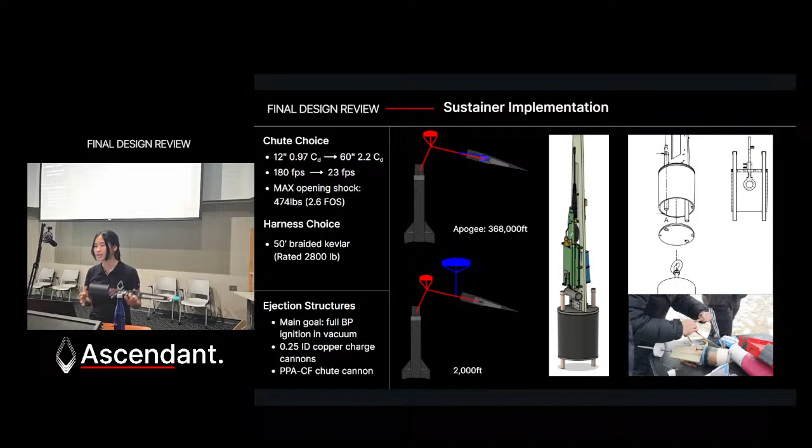As you can see right here, this is where the main chute will be held. We are calling it a chute cannon. It will be printed out of PPA-CF, and it will constrain the main chute before 2,000 feet. At 2,000 feet, the black powder charges inside the chute cannon will pop open the cap at the end of this, which you can see in the exploded view over there. Then the main chute is ready to come out and decelerate our rocket so it does not blow itself into smithereens. I'll be passing it on to Ella and Luke for testing.

So we built our own custom 4-inch static fire test stand. This is made out of 10 series T-slot extrusion, otherwise known as 80/20. We use grade 30 chain to separate and hold the stand down to the ground, especially during firing, as you can kind of see on the image to the right. Those are connected to ratchet straps, which help extend out the reach of those ground ratchet straps to help hold the entire static test stand in place.

We use chain because it is metal, and the rocket motor is constantly ejecting very hot gases and hot materials. If any of that hot material lands on the ratchet straps, which are generally made out of nylon, they're just going to burn straight through, and then those ratchet straps will snap or fail, which we really do not want when we have a rocket motor firing.

To take the actual data on the thrust stand itself, we have one 10 kilonewton load cell and one 20 kilonewton load cell. We also have a 2500 psi pressure transducer, which allows us to measure the pressure and force generated during each firing.

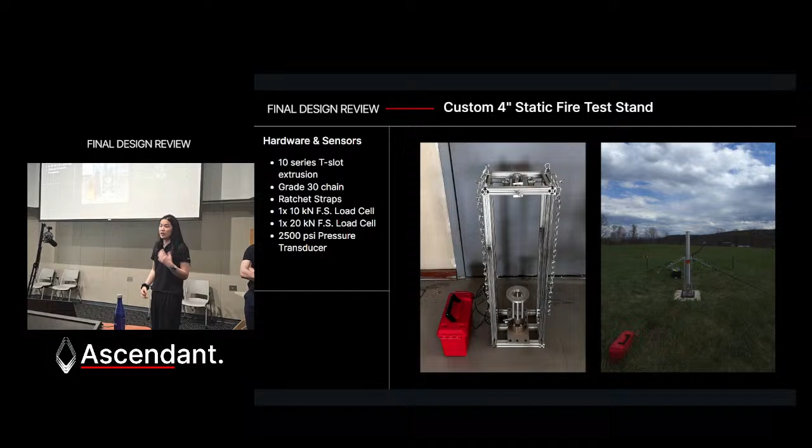To actually collect this data, we have designed what we call our data acquisition box. This allows us to collect the data from those sensors I previously mentioned. We collect both load cell data at around 70 hertz, or 70 samples per second. The pressure transducer data we sample at around 200 hertz, or 200 samples per second.

To do this, we use our own electronics, starting with the processor, which is an ESP32, specifically the Heltec V3 Wi-Fi kit. Then we have the two HX711 load cell amplifiers. These are needed because the actual voltages coming out of the load cell are quite small, so you need to amplify that in order for the processor to be able to read it. Next, we have an SD card breakout, which allows us to store all of the data we generate off of the RAM on the ESP32. Next, we also have a 5-volt regulator, which allows us to use a lot of different batteries to power our processor.

To actually run all of this, we have our own code base, which is Arduino based, so C++. This allows us to sense when the test starts and log all of our data. This also allows us to decouple our data logging, which lets us log at two different refresh rates. This is required because Arduinos are single core chips, meaning they can only do one process at a time, so our code allows us to more easily log the data at the two different refresh rates.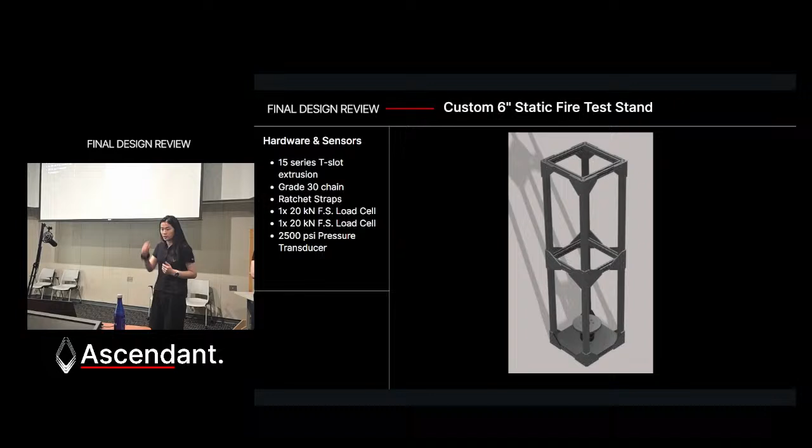So, a little bit of a switch from there. We have a hydrostatic test system. A rocket motor is essentially a pressure chamber where you're directing the flow out one direction to create thrust. So when we're creating these pressure chambers, these motors, and working with machinists to actually make them, how do we verify that it's not going to burst during a test and something catastrophic could happen?

What we do is we hydrostat test the system. This is where we pump water to a very high pressure into the actual motor casing and close it off, just to see if it's going to leak, if it's going to pop, if anything's going to happen. The reason we use water is because it's an incompressible fluid, so if it does pop, it doesn't store energy and explode.

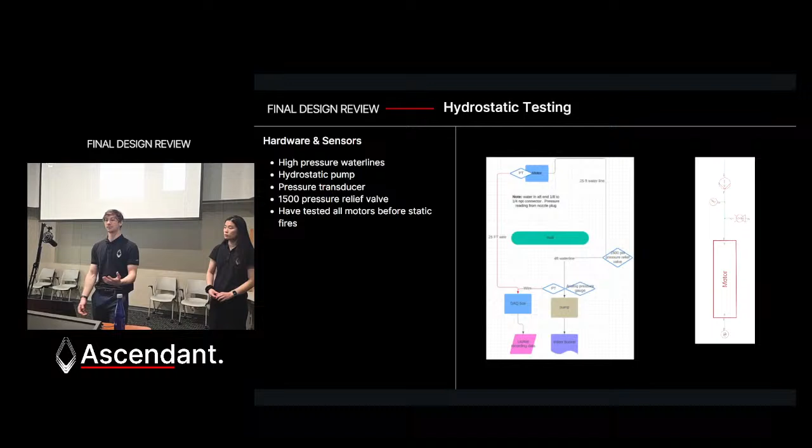So you can see on your left, this is a rough diagram of it. We have a hydrostatic pump, which is hand pumped, believe it or not. It takes about 100 pounds of hand force to get to 1,000 psi, and that pumps the water into the motor, which is sealed. The motor also has a pressure transducer, which we use the DAQ box to monitor in real time, comparing the gauge pressure and the actual pressure in the motor to make sure the gauge isn't wrong or the pressure transducer isn't wrong. We go way past our safety factor we're trying to reach, and it doesn't pop.

Next, moving on, you heard Sawyer talk about strand burning earlier with propulsion. So how does this actually work? What's the testing procedure look like? Strand burning works using a pressure chamber, and when we make propellant, we'll make hand batches before making big batches in the machine to see how processable they are and how they look. To test these, we do hand batches.

We cast them in a 3D printed mold, and they look like rectangles. We take them out of the mold and measure their length. Then we dip them in an inhibitor and place them in our strand burner. A strand burner is a pressure chamber which is sealed, and we fill it with inert gas, at 3 different pressures across 3 different tests. We ignite the propellant and measure the burn rate using a high-speed camera, counting the frames per second against how long we measured the propellant strand to be.

Why do we do 3 different pressures? So we can predict how the propellant acts on a large scale. You might have heard the term characterization thrown around—that's basically what it's doing. We do 3 different pressures, checking how it burns and what the burn rate is, so we can model more complex geometries and scale the propellant.

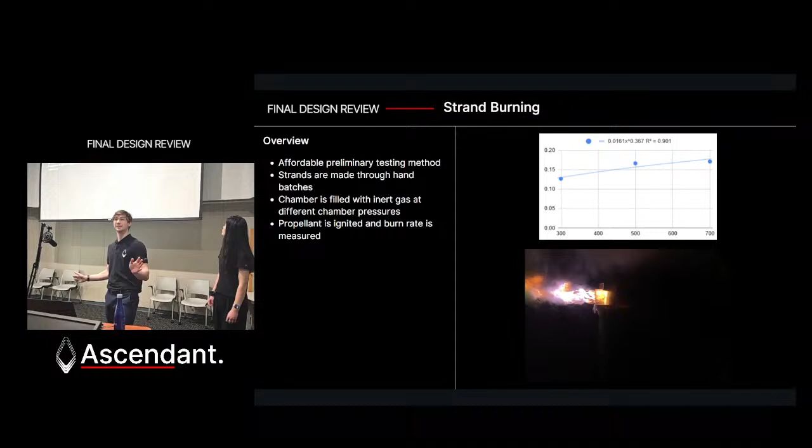On the top there are those 3 different data points with a fitting. Our R-squared isn't the best on this one—I didn't grab the best example, so there's some uncertainty there. But historically, we've found that strand burns with higher R-squareds are about 5% off actual characterization fires, which is very good when we're trying to iterate propellant fast with this test procedure.

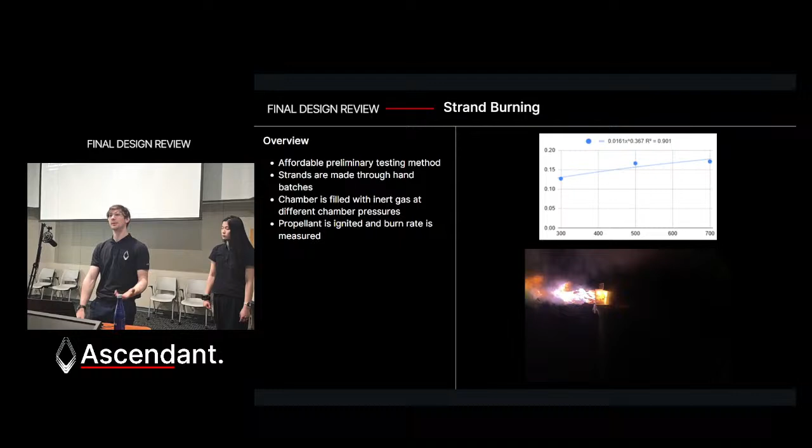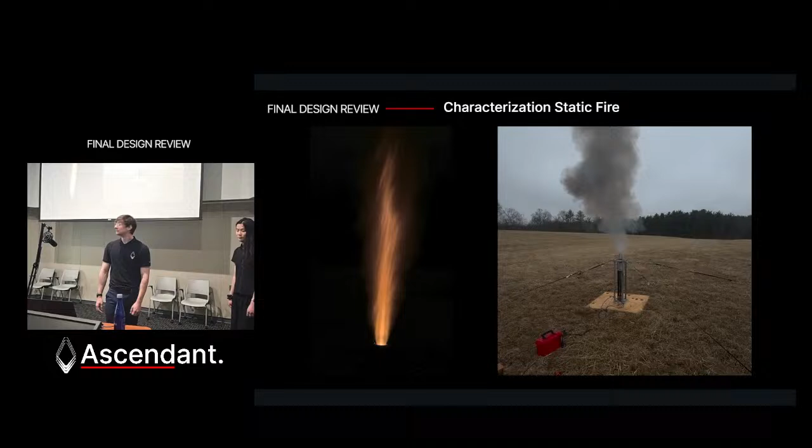So you can see, maybe you can't, but these are both the same size test burner. Why does it look different? Well, the characterization fire is similar to the strand burner. As Ella talked about, we have nozzles with 3 different throat sizes that we process. Why do we have 3 different throat sizes on our characterization?

The video's not playing again, but it's to do the same exact thing we do on the strand burner. We take it into the lab, do our small scale testing, and next we go to 54 millimeter testing, which is a more realistic simulation of our actual grain geometry. So once we take this out into the field, why did those 2 videos look different?

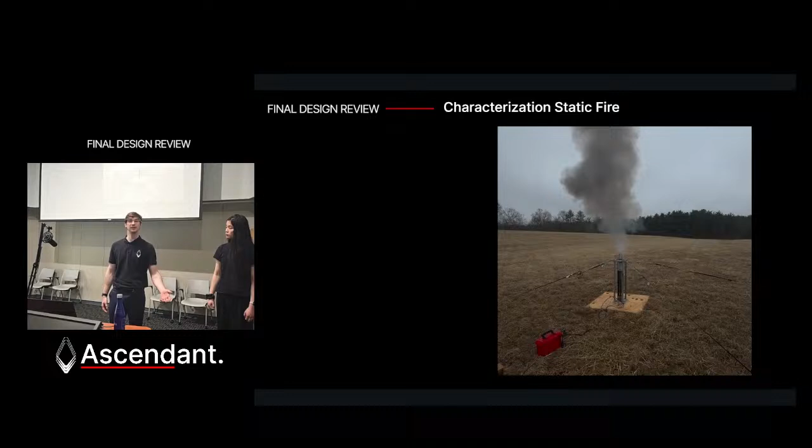It's because the nozzle sizes were different. One was way overexpanded, where you saw that aluminum shooting out almost like a flow separation, and on the right-hand side you saw more of an optimal nozzle geometry, where we try to hit the same pressures we hit in the strand burn. You can see how far off this is from our actual lab testing. How can we dial this in? How can we dial our mixing procedure in to actually get more realistic results in the field as we scale?

So those tests, this is what the data looked like from the one you saw on the left and right. And you can see, why is there a big spike? That's called erosive burning, as Rowan talked about earlier, where when you have a large amount of gas at startup, it actually shears particles off the wall and creates a pressure spike.

So when we take these characterization motors into the field and test them, we actually test for their erosive properties. That's something the strand burner really can't do. By seeing how much of a pressure spike we could potentially get in a large scale propulsion system from just the small scale data, we can scale that roughly, and even scale it more if we want to be extra safe, and create a motor that's designed to withstand something that needs a higher safety factor, because we know how erosive it is.

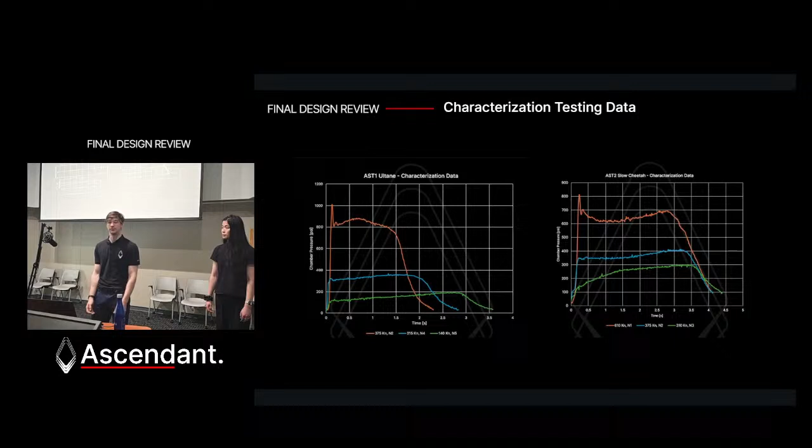So sometimes during our static fires, we actually create geometries that are more erosive than we're actually trying to do, to create more of a pressure spike, to see roughly how that compares to the resting flat area in our propulsion system.

All right, I'm going to talk about a bit of the testing that we do outside of just propulsion. We did a tensile strength test on the avionics sled that was shown previously. We have these Instron machines on campus which allow us to pull the sled to see if we can actually handle some of the forces that it may experience during flight.

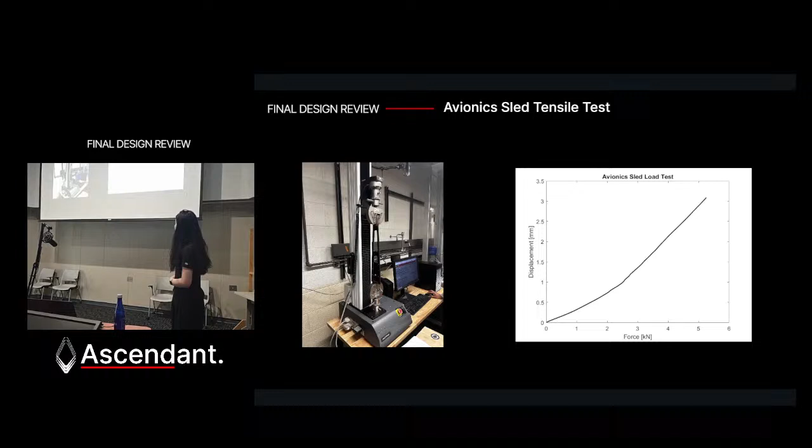On the left, you can see that picture of the sled itself on the Instron machine. Unfortunately, this Instron machine can only handle up to 5 kilonewtons of force, which is around 1,000 pounds of force. So on the right, you can see the force versus displacement graph of the actual sled itself, and it didn't fail, which is really, really good.

Next, I'm going to hand it off to Trey for acknowledgements.

Yeah, so it's safe to say we could not have done this without help. We're not on our own here. We received massive help from both RPI faculty and others. Starting off with RPI, we received guidance from various RPI faculty and support in terms of providing lab spaces and just helping us get this mission along its way. We would not be at this point without RPI. It's just plain and simple. They've supported us through the very beginning up until now, up until post-space shot.

In addition to RPI, we've also received guidance and support from industry professionals - people over at Anduril helping us with our propellant formula and mixing procedures, people over at FlakTech supporting us with the mixer and providing guidance on that, as well as people in the amateur rocketry community helping us gain certs, gain experience and knowledge from our first mix all the way up to level 3 certifications.

In addition to this, we've received support from over 70 different members of our community, family, faculty, and various donors who have supported our funding campaign. This funding campaign has raised over $13,000, and we're at almost 70% of our goal. This is huge. This is one of the ways we make this space shot happen.

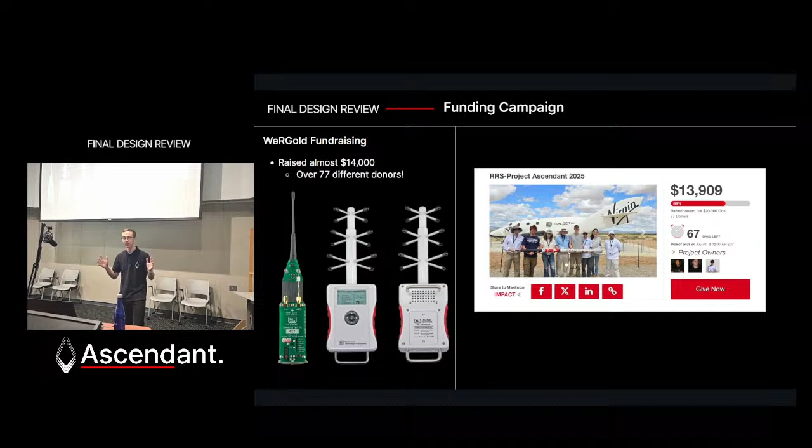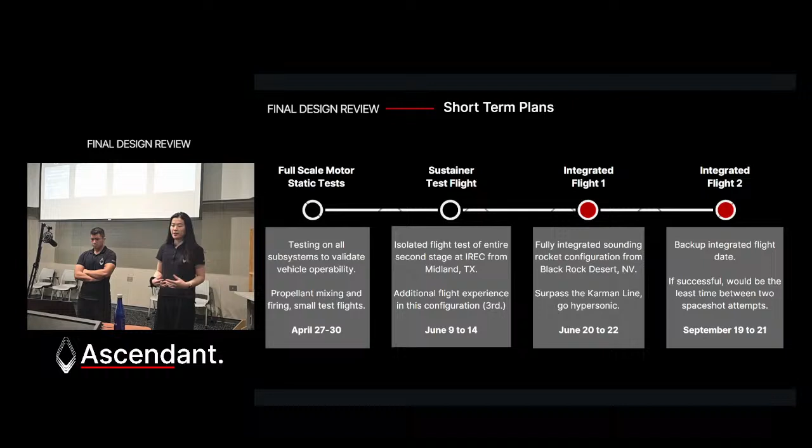Then we will have our first integrated test flight. This will happen between June 20th and June 22nd in the Black Rock Desert in Nevada. This will be our first chance to surpass the Kármán line and reach space. If this date doesn't work out for us, we have our second backup integrated test flight, which will happen between September 19th and September 21st of this year. This will also happen at Black Rock Desert in Nevada.

If the first integrated test flight goes well, we will then use the second flight date to try to do it a second time. This would allow us to be one of the first teams to do two successful attempts in a very, very short amount of time.

So one of the biggest things that every engineer needs to consider when working on a project of this complexity is, what can I do better? The biggest part about engineering is iteration, and as you know, at our core we are a propulsion team, and we believe there's still many more steps to take with our propulsion systems before we reach industry standards.

So first of all, both motors are not properly optimized. The AST1 is not perfected for efficiency. You can definitely increase your solids loading, and the more oxidizer and fuel you stuff in versus liquids, you get a higher C-star as a result. Up to 88 is what we've seen in industry. As for the burn rate, currently it's on the slower side, so incorporation of catalysts such as red iron oxide, ferrocene, catocene, stuff like that, can give us a bit higher burn rate. Additionally, I'm not going to get into too much detail, but you can also get into more exotic formulations. As for AST2...

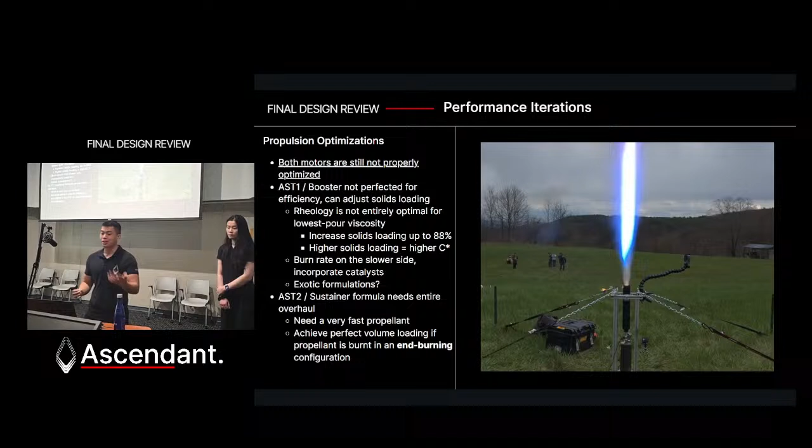There's no center perforation, it doesn't burn outward, it burns upward, kind of like a firecracker. Doing that would achieve much greater burn times, but the thermals would be a much greater consideration. If you want to make it burn faster, wired end burners are the way to go, or a faster propellant. However, that's not relevant at this time.

Now, what we can do with the airframe is increase the mass fraction. We're running very heavy on our materials, very reliant on aluminum, and with the case material, that takes up a lot of mass. Currently, our mass fraction is at 0.483. From what we've seen with industry standards, I think the Arcus has a listed mass fraction of around 0.7. Mass fraction is essentially the mass of your propellant divided by the total mass of your rocket. As you know, your delta V actually scales asymptotically to infinity as your mass fraction approaches 1. So getting into that sweet spot of 0.7 can give us a much more efficient rocket with less propellant needed to be used.